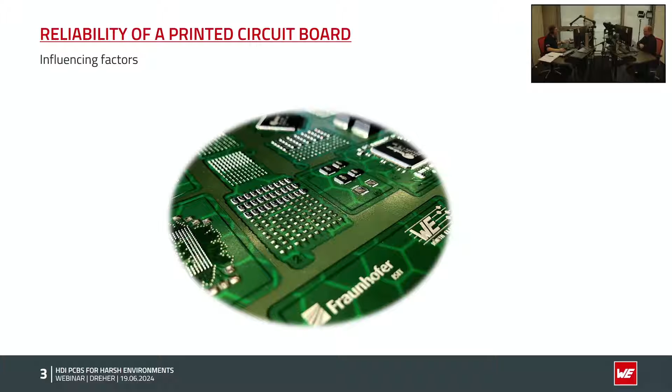So let's dive in with a quick overview. I thought, for example, voltage breakdown is a very important topic. We will discuss a lot about temperature and temperature cycles. We have some mechanical stress through vibration or through different components. We have some harsh environment gases with some bad contents in the air for the PCB, and of course humidity is always a very interesting topic.

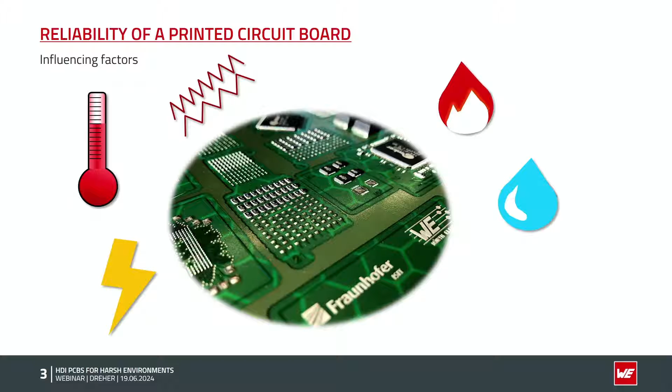But before we dive into these topics, what is reliability and what is a good definition of reliability? And that's here in my summary box for every topic, and I pretty much like this definition. Reliability describes the ability of a system or a component to function under stated conditions for a specified period of time. I can give you different numbers for reliability of your PCB, but can you give me the stated condition or the specific period which you need this product working? Very often that is very difficult to answer.

And in many sections, a lot of customers have industry applications. Do you really know what your end customer is doing with your board? Are they putting it in a nice media room like we are here in the webinar, or putting them close to a galvanic line in a production which have different conditions? So very often it's very hard to define the stated conditions and the specific time. To measure the reliability is, compared to that, often very easy.

So let's dive into the topics, and I would like to start with a simple one and we get more complex as further we progress through the slides. Let's start with humidity.

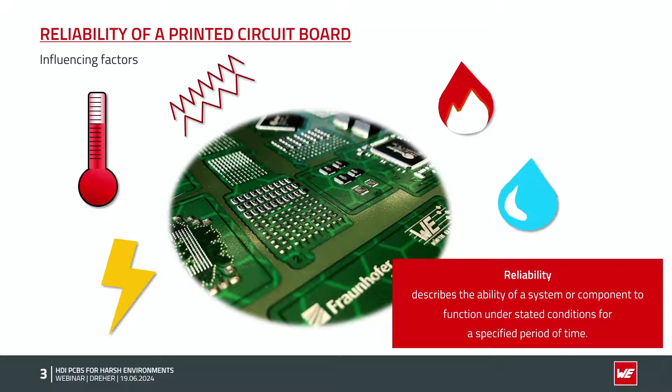The PCBs are built with a composite material, so we start with glass fibers, coat them with resin, apply some copper, and then multilayer is more or less done. The copper and the glass fibers are pretty stable, but the epoxy will definitely absorb some moisture from the environment.

And here is an extract of our great summary, Physics of Humidity. I put a link in this presentation because Andreas Schilpp had already given a nice webinar and a good summary with a lot of slides on it. There you can get more information on that topic.

But as a quick introduction, if you use a dry PCB, put them in an environment like 40 degrees Celsius and 92% relative humidity, you can see that after a few days already a lot of moisture gets absorbed by the material, and it will continue for a very long period until it finally stabilizes and gets more stable.

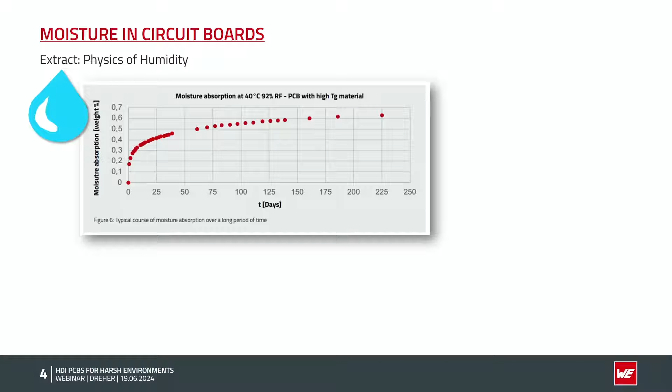The question already, and that is design dependent, is what is the critical level? How much moisture is okay for the PCB, and then it is too much. And that's definitely dependent on the layout. There's no simple black and white answer. It's always a little bit gray.

In this extract, or in this Physics of Humidity paper, you will find also some ideas about drying, how to get rid of humidity from the PCBs. And again, the layout is here a very important factor. You can see here we have a section with only resin, no copper at all, with a little bit of copper, some copper, and full copper, for example, on a ground layer.

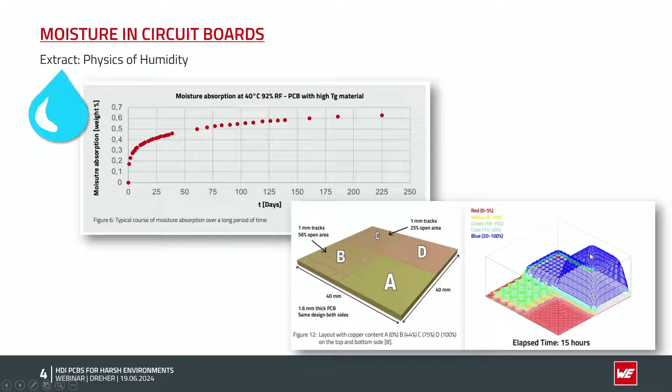And when you do some drying, here in this example it's 15 hours, you can see that in the only resin area, the humidity gets very fast in, but also it gets very fast out. And as more copper you have, copper is a good barrier for moisture. It's harder to get for the moisture in. It can creep in from the edges, for example. But again, also at drying, it's harder to get rid of the moisture, so it has to move to the edges. You can see here in this graph on the edge it's dry, and in the middle it's still very wet.

That's great. Now Andreas gets some coffee.

That's one not translated page.

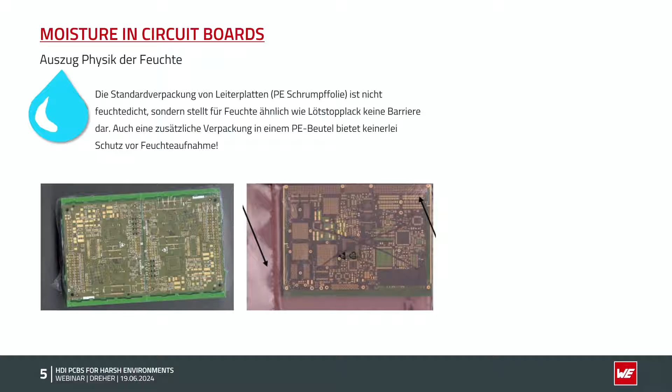One more point is the packaging of the boards. A standard packaging of a typical PCB uses only PE plastics, and this is no protection for moisture at all. It's a mechanical protection - if you put a glass of water on it, it sheds the water, but moisture in the air can pass through this PE plastic very easily and go in and out as it likes. If you really want moisture protection, you have to use aluminum coated bags, which have a high moisture barrier so you're really protected.

In general, boards have to be dried before use, before assembly. If you get them from us, they are not pre-dried, so in general you have to do it yourself before the assembly process.

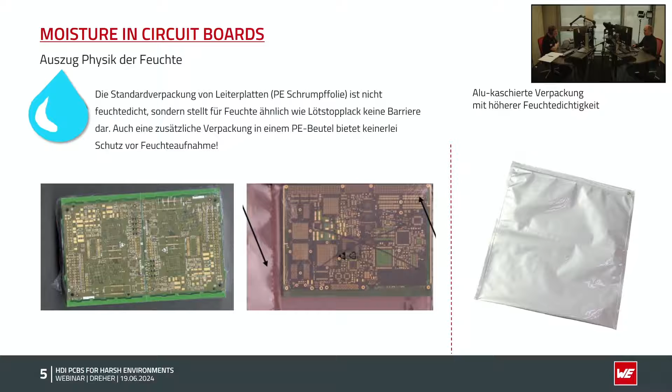There are a lot of things to consider, and as I mentioned, we already put together a nice webinar and a very big summary. You can find the link directly on our homepage today if you check for moisture physics, or you'll find the link later in the slides directly to the landing page where you can deepen your knowledge on this topic.

Printed circuit boards are sensitive to moisture, and it must be evaluated depending on the layout, because the layout, as we already learned, has a big impact on the moisture content. Another topic is harsh environments for the PCB.

In discussions with customers, I often hear, 'we're just doing simple electronics for industrial applications, we don't have very high sulfur or chloride contents.' But we are now getting close to summer season, and a lot of big towns have smog problems in the air in summer. In the meantime, in big towns you have a very high concentration of these gases in the air. A few years ago we used such concentrations for accelerated testing, and now you already have them in the town air. So this can really be a problem everywhere, in all applications.

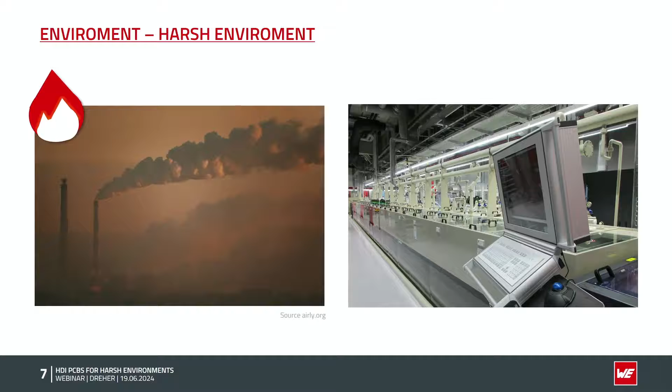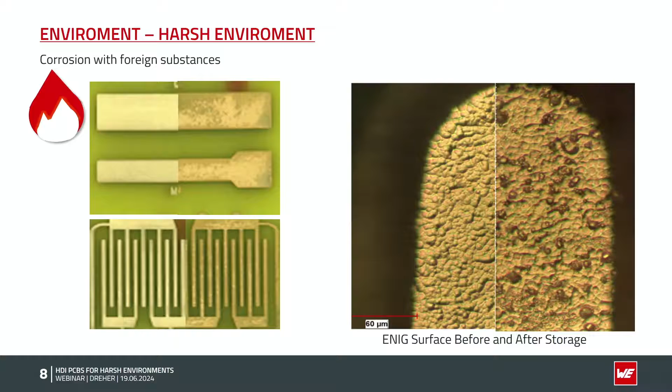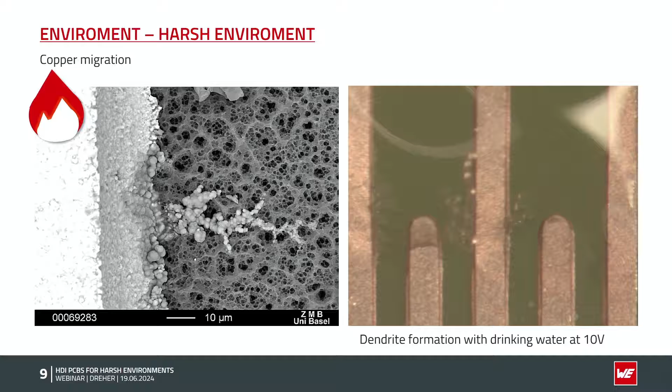If we look additionally at chemical surfaces like immersion tin or immersion silver, we often see copper migration. You can see here in this animation I used a test structure with only 10 volts DC, and I put a drop of drinking tap water on it - immediately it's really live. After seconds you see migration happen, creating a short, and the structure fails. Of course a drop of water on electronics is pretty extreme, but humidity on the surface can cause the same thing over weeks or months, and the structure will fail.

So here's a summary: we have different causes. We have corrosion, especially with sulfur or chlorine products. We can have oxidation before assembly, which is a problem in storage - after assembly it's typically not an issue anymore. Or we have this kind of copper migration.

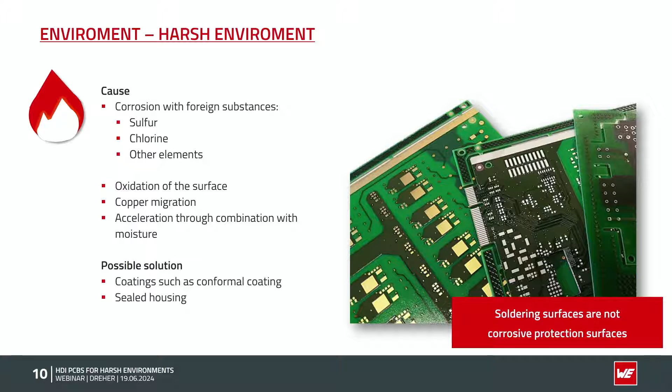If you have a combination with moisture, this will accelerate the aging and can cause pretty fast problems. What are possible solutions? You have to protect the electronics for these areas, they are not made to withstand it. So a coating can help, like a conformal coating, or you need a sealed housing, for example the picture with the computer with a sealed housing so that you don't get any crazy substances on the electronics. So definitely the point is soldering surfaces are not corrosive protection surfaces, even if it's nickel gold.

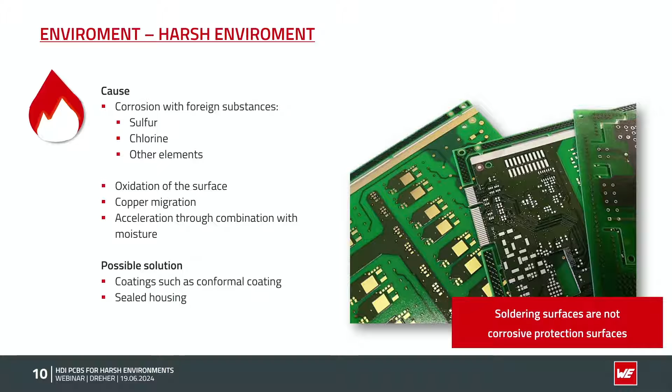Some mention gold is not corroding. Yeah, true. If you look at ancient artifacts from the pyramids 4,000 years ago, they are still shiny, they look great, but they are massive gold. On the PCBs we have only 50 nanometers, so it's a very thin thickness of the gold, and by standardization it's a porous surface, so the sulfur, for example, can penetrate the gold and oxidize or corrode the underneath laying metals. So definitely you have to protect the electronics against that, they are not protecting themselves.

Another very important and hardly discussed topic is mechanical stress in printed boards. The PCB itself, as I mentioned, is a composite material with glass fibers, epoxy and copper. We have additional solder joints with some tin alloys. We have components, sometimes we have an interposer, like in this case the BGA. This is a different base material to the PCB, often with a very high TG. You have the silicon die, the chip itself, with the wire bondings afterwards, and some molding compound with fillers. On the right hand side you have a similar BGA but with a metal lid, which is often a nickel alloy, sometimes with copper areas as a standoff or as a heatsink. Copper has very good heat conductivity.

Again, some different FR4 material, for example, and the PCB. With all this mix of different materials, that can cause internal stresses, especially if you change the temperature.

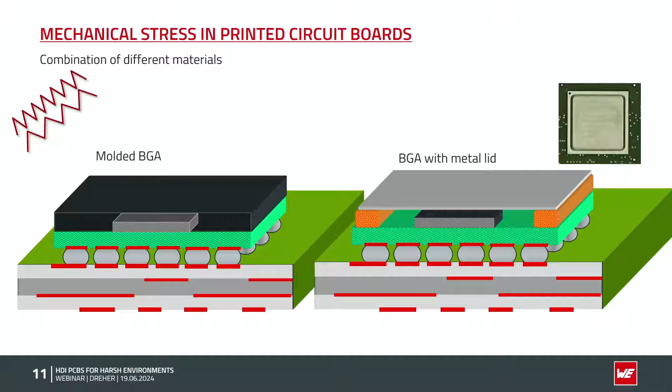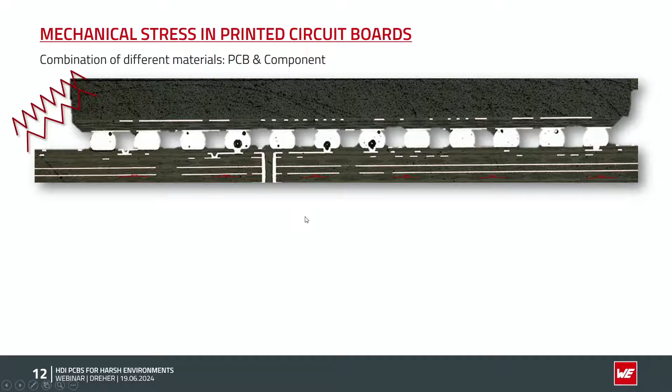Let's have a closer look. Here we have a microsection. On top you have a BGA with a molding compound. The silicon die is not hit here, it will be deeper into the component. You have the solder joints, the BGA balls here, and underneath you have a standard multi-layer board with some micro vias, buried vias, and a lot of tracks. In that case, the customer had the problem on the left-hand side, there was some stress, and if we have a closer look, this ball is actually this one.

There is a crack underneath in the material, and really the whole copper pad, including some resin, was ripped off the PCB. Another ball with a micro via in pad - the micro via had withstood the stress and was bending the inner layer, and here you can also see a crack into the material. In that case it was connected by a track, and the track got a break and was destroyed - that was the failure mode for this board.

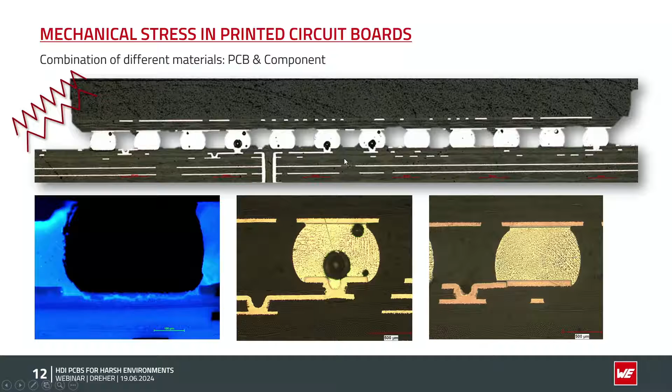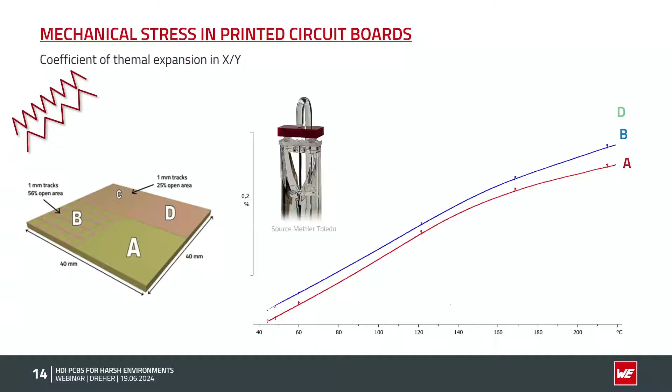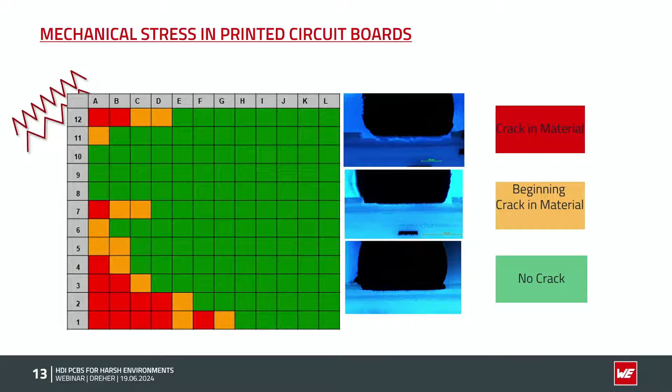And if you include all the materials inside the BGA, the mismatch should be as low as possible. What was the customer's solution here? We changed the position of the component from the edge of the board more to the middle of the board, added a little bit more copper on the ground planes so that we get more stability, less stress, and afterwards the whole section was green.

So the layout will definitely influence the mechanical properties of a printed circuit board, and in general, more copper will strengthen the board.

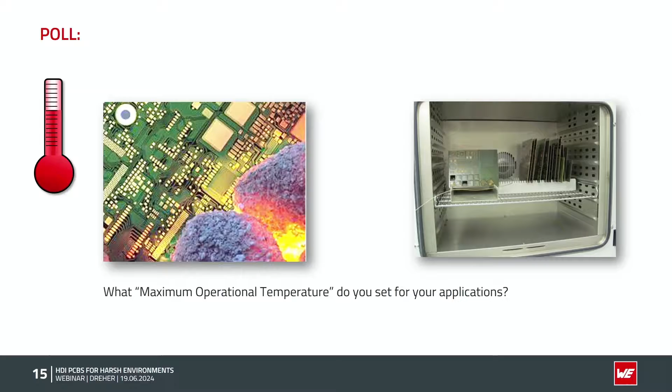So you have the numbers and it's still a pass, and that's really a point to think about - is this really enough for your application, and where a safety factor should definitely be added. So for example, this is a section.

There's a question from one of our participants: what temperature are you talking about? TA, Tin, TJ? I would assume it's TA, so the ambient temperature - is that right?

Yeah, that's a good question. To be honest, to translate that to the UL standard - definitely it's a good point, because that's why I bring it up. Maximum operational temperature, for me as a PCB point of view, maximum means maximum - so the hottest point in the field. But there are definitely different specifications, and to be honest, I'm not aware of this T-in, TA distinction.

But what we do is take the board, put it in the oven, heat it up, for example 1000 hours at 125 or 150 or 160 degrees. You can see in the as-received state it's a nice black forest green, and after some temperature exposure you definitely see a degradation in color, but also in the properties. The plastics get more brittle, the solder mask gets more brittle, and the factors will change.

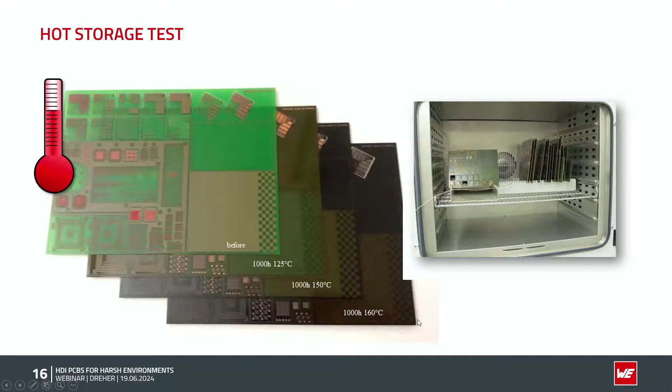That's some point to consider. We have a pass, for example, for our solder mask at 160 degrees, but the UL standard had, a few years ago, the maximum level at all - the highest level possible in paperwork was 130 degrees. A few years ago they added a second, higher value of 150 degrees, which now modern base materials and modern solder masks can be listed in UL to this temperature. But as I mentioned, a few years ago, even a TG 200 material was listed as a MOT 130 material, because there was no higher class.

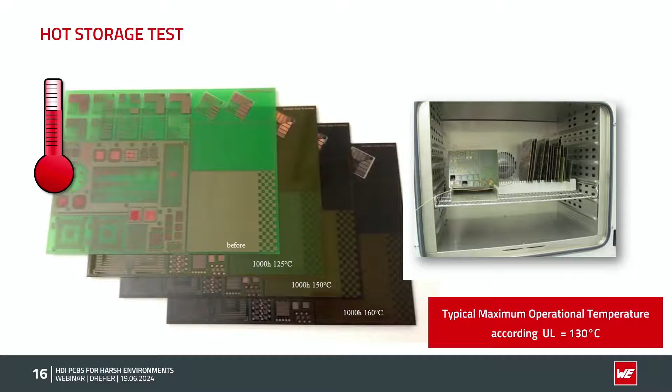And that's very often a big discussion, and that's why if this is so important for you and your application, we have to talk about it beforehand. What do you mean, how do we define maximum operational temperature? Is it the UL standard, which is a pretty simple test? Do you have some other ideas, do you have some peak temperatures? Maybe a component has some internal temperature which is locally heating up the board. We have to talk about such things if this is still possible.

One example, the dielectric strength of some materials. Here we have the setup for how to test it on a board. We have a kind of multimeter where you can set up, for example, 1000 volts, and you measure the resistance on some layout features.

In this cross-section, we see the solder mask very often. The edge is the thinnest part, so we will test here and have some typical values.

But can we calculate it down? For example, a typical thickness will be maybe 5 microns, maybe 7 microns on the edge. Can we calculate it down to some value per micron? You cannot scale it down freely, there is some limit.

The same is true for dielectrics like FR4 prepreg. With one prepreg, there is a chance the IPC allows some residues inside the prepreg per some area, and this residue can lower your dielectric strength. So if you have a high voltage application, you should always use two prepregs, because the chance that some inclusions are in both prepregs on the same place is close to zero. That's where you can use the high numbers.

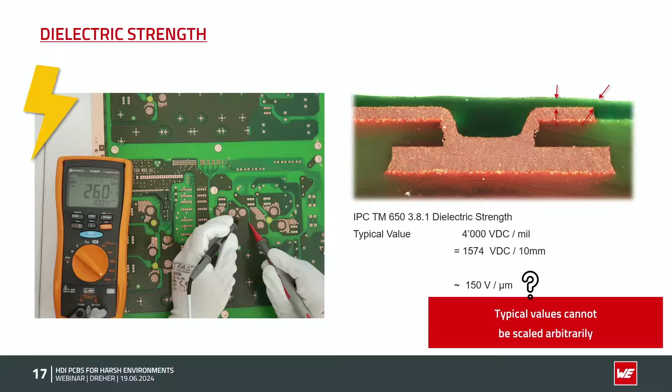Another thing, and now Andreas gets a second coffee.

Another thing is, if you look on a data sheet, the typical numbers on a data sheet are carefully measured in a lab area, but can you use these values directly for your field application?

Do you have in your application such a setup where you can have, for example, 400 volts as a breakdown voltage? I don't think so. And again, here only the raw material, the core, is tested, and it's not a real PCB. So the data sheet value is true, but can this value be translated one by one to your field application?

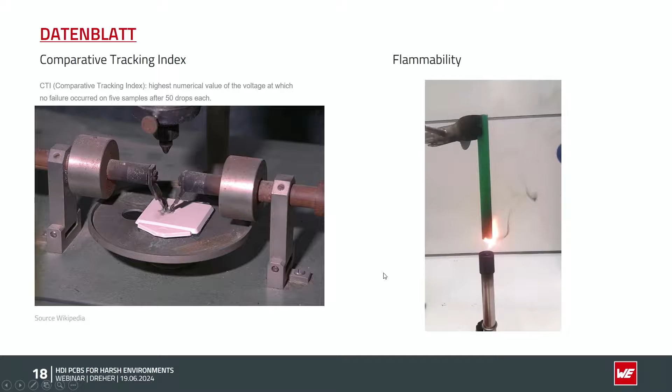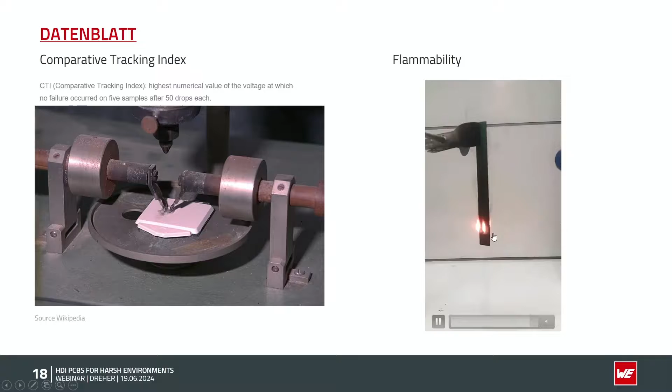Another example is the flammability test. Here you use a very closely monitored flame, put it 10 seconds to a test strip, and after additional 10 seconds the flame should be extinguished by themselves. If you have that, then you get a V0 by UL, for example.

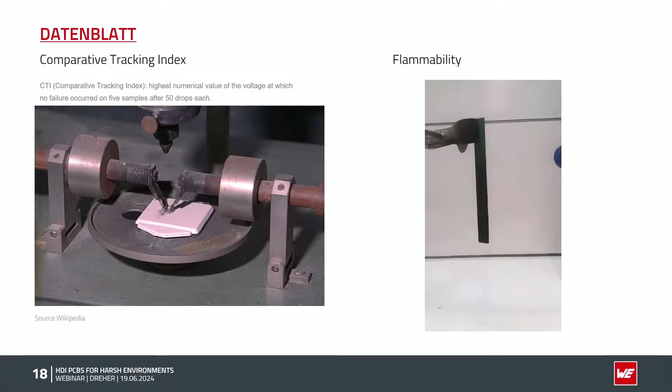But again, do you have such an application in your environment in the field? Is this the one-to-one conversion for you? You can very well compare material A against material B with such values, but can you use such values in your real-world application? So definitely the transferability of datasheet values should be closely checked, and you really have to think about what values you use for your setup.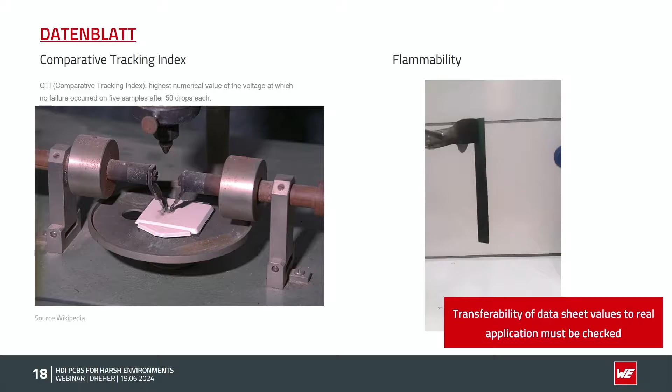So now a very big topic came about temperatures for PCBs. That's the most discussed topic for PCBs. A quick look at what is in the life of a PCB, what temperatures are affecting it.

In our production, according to the complexity, we have 1 to 4 press cycles at 200 to 220 degrees maybe. In the solder mask oven, the curing of a solder mask is done 1 hour at 150 degrees. Later in the assembly process, you have typically 3 times 230, maybe 240 degrees.

For testing, we use 6 times 260, but please only use it for testing, not for a real process. That would be too hot and will destroy the PCB pretty fast. And the field application, as we mentioned, it's very often hard to define what the board will really later see.

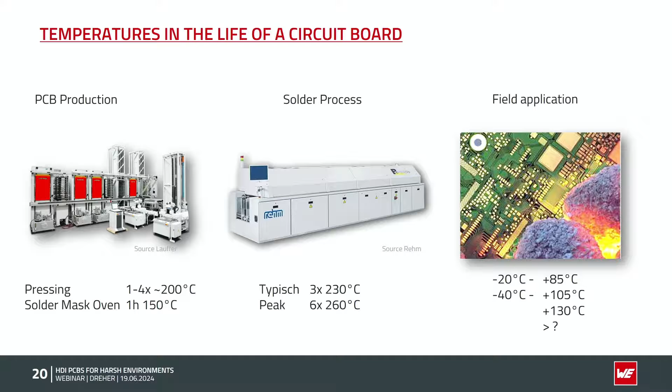So there are a lot of temperatures to consider. Typically, we test them in a 2-chamber oven where you have an oven on top and some freezer below, and the boards will move up and down between these 2 chambers. That can be half an hour or an hour cycles, and the temperatures can be defined.

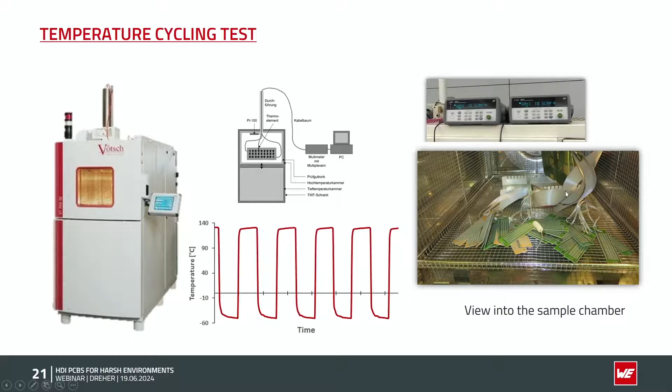You can use some online monitoring, add some cables to the coupons and measure them, and get an idea about the quality.

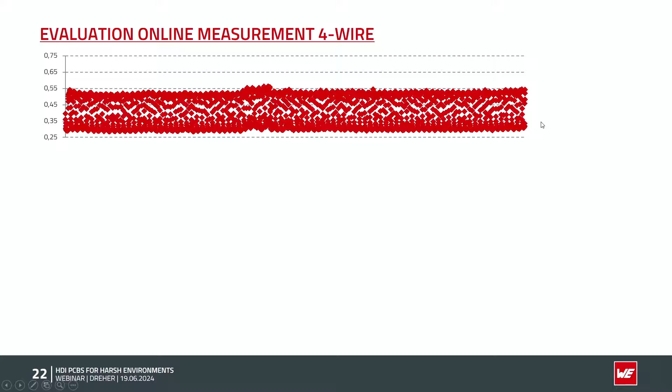There is an IPC standard for this evaluation to measure the resistance of a board. For the IPC it's very important you have some milliohms, or ohms in that case, before, and then you do some cycling and measure it also at the end. If the beginning and the end are the same, it's a clear pass. There we can very fast agree.

On the other hand, if you have some change - here it was 0.5 before, afterwards it was higher - there is some critical number which we can define together, or there is some standard in the IPC, and then again, pretty clearly, it's a fail. But we are working in real life.

What if with such a measurement? IPC check, before and after the same, just with standard IPC, that's a pass. To be honest, I don't want to fly with this kind of plane into the holidays. We have to check what happened here, and that can be very tedious and very time-consuming to find the problem and to fix it afterwards.

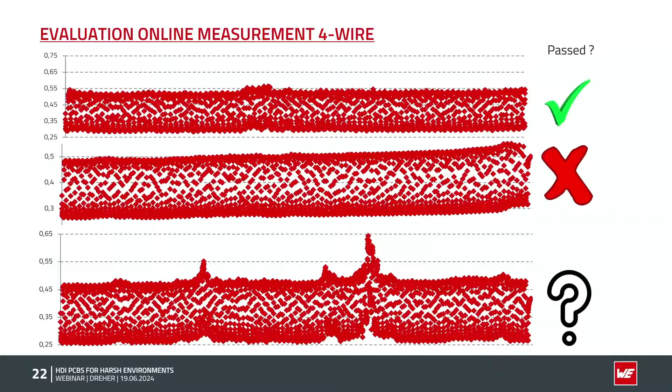That was the thing - we still have the oven in use, but it was very hard for us in a qualification process to really understand what's going on. So we changed the test method to this Interconnect Stress Test 10 years ago already.

So what is Interconnect Stress Test, or IST in short? We have different test chambers where we can add the coupons. We will add some cables, heat them with some currents, 7 to 10 amps, up to different values. In this graph it's 150 degrees for 3 minutes of heating and 2 minutes of cooling, only at room temperature.

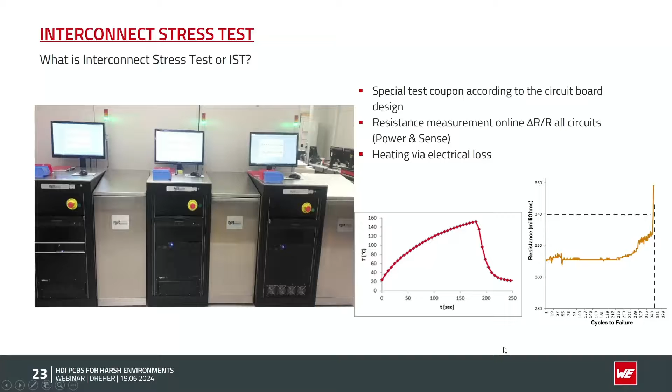During this whole thing, we measure the resistance online, really live. We see the live measurement, and when the resistance changes, for example 10%, that's defined as a failure. The test will stop for this single coupon, while the others can progress. I can take this coupon, investigate and learn about what was happening to it.

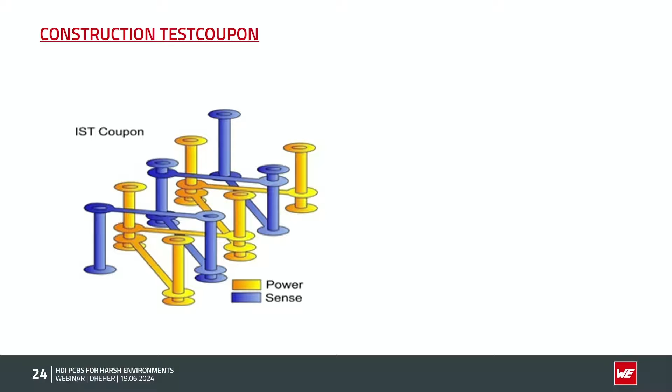Let's have a closer look. We have different structures here internally. The golden one is the power structure, where we can add some current and heat the coupon up. And with a sense coupon we can measure different structures.

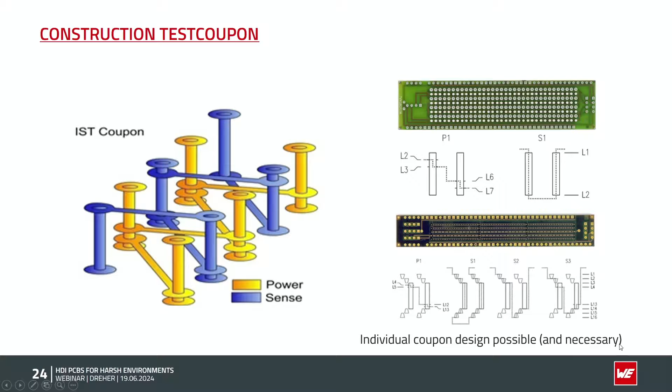For example, here it's a generic coupon where we test some small vias, some through-hole components, or that one is a more complex one, which was created for customer use with a complex HDI board with a lot of micro vias and through-holes, buried vias, where we can test individually - is the micro via more reliable, is the buried via more reliable, or what's the critical point. So you can really create individual coupons, and very often that's necessary and very helpful to compare different sections.

In the following slides, we will compare different tests with the so-called Weibull evaluation method, and I don't want to go too deep into the statistical things. So in the graphs, for us very important is this 63.2% failure mode. That's for a Weibull evaluation an average to compare the average failure rate. The shape is not so important for our kinds of evaluation.

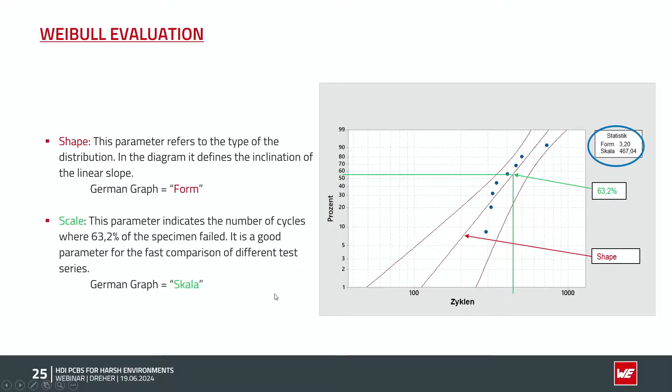So here are some tests with mechanical vias. It's always the same board, nothing changed. They are produced in one batch, and we applied different test temperatures. The black line was 150 degrees test temperature, the red 170, and the green one was 190. And you can see for 150 degrees had a typical failure rate of 1,500 cycles when most of the coupons failed, which is pretty good.

And of course, the higher you go in temperature, the lower the average cycles will be. So after 400 cycles, most of the 170 degree coupons failed. And after only 120 cycles, the 190 degree ones failed. So if you have such a peak application, you can see the stress is pretty hard, and the factor between is very hard. So if you have some local peak temperature, that can destroy especially through-holes pretty fast.

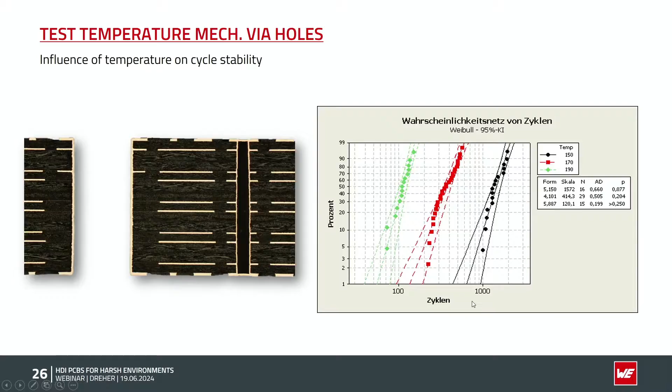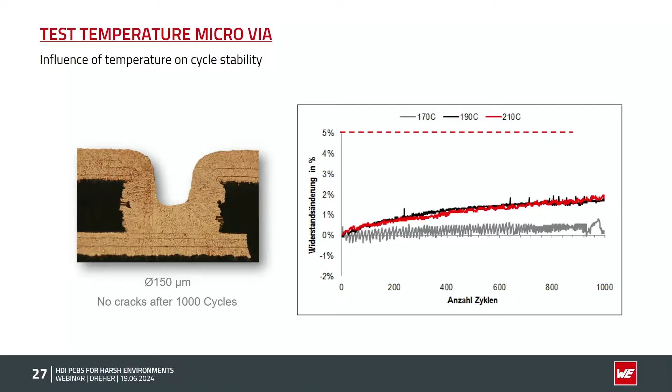Compare this to microvias. The microvias have a benefit - they only connect one layer to another layer, so the Z thickness is pretty thin, so the stress is also thin. Here you can see microvias with different temperatures, and the resistance change over 1,000 cycles changed only a few percent. 5% would be the failure mode, so the microvias after 1,000 cycles didn't show any sign of wear and tear. So microvias, through the low Z value, are pretty stable and pretty reliable.

The same thing applies here. We compared different thicknesses of a board. We had a board, the target thickness was 2 millimeters, and for the test we added on some other boards with the same layout 2 prepregs to increase it by 0.2 millimeters, and we removed 2 prepregs to have a thickness of 1.8 millimeters. The 1.8 millimeter board had, in the green section, an average failure rate of 180 cycles.

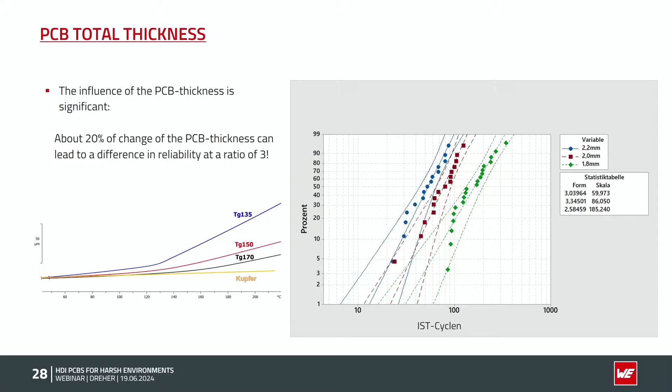The 2 millimeter board had roughly 80 cycles, and the thickest one, the 2.2 millimeters, failed at roughly 60 cycles. So with this 20% change in thickness, you have a factor of 3 in the reliability. That's an important thing to remember. Every millimeter in thickness will directly affect the reliability.

And again, a very hard comparison: if you create a very thin board with microvias and a small buried via, 0.6 millimeter thickness, we stopped the test after 2,000 cycles without any failure. They were still good and did not fail, we just had not more time to progress the test. So the thinner the board, the more reliable it will be.

Very often in the last weeks and months I get the question, what is it about non-functional pads and what is our recommendation? We had a student who did a study and compared a lot of literature, and it was really a 50-50 split. Half the literature told you to add the non-functional pads because it improves reliability, and the other half said remove them, it will add more reliability. So that's why we wanted to do the test.

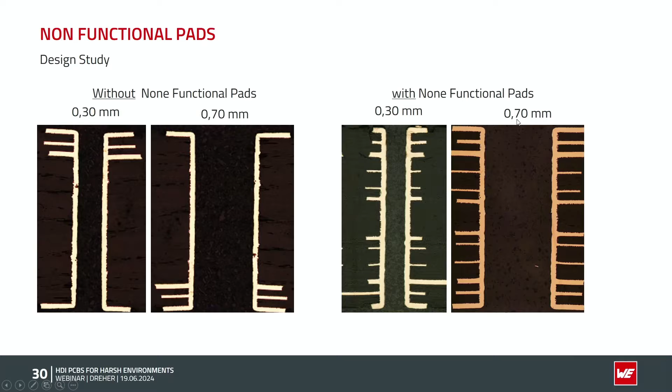We have the same board, produced in one batch. Half of the coupons had the pads removed, on the other half the pads were included, and we compared small vias of 0.3 with bigger vias of 0.7. Here is the summary.

Very interestingly, the small vias of course have less copper so they generally fail earlier, and the 0.3 millimeter vias with non-functional pads failed pretty early, with an average number of 150. On the other hand, the 0.7 millimeter holes had the best reliability in that test, at an average of 370, roughly double. The boards without pads had somewhere in the middle, around 300. So that's very unfortunate. What do we learn from this section?

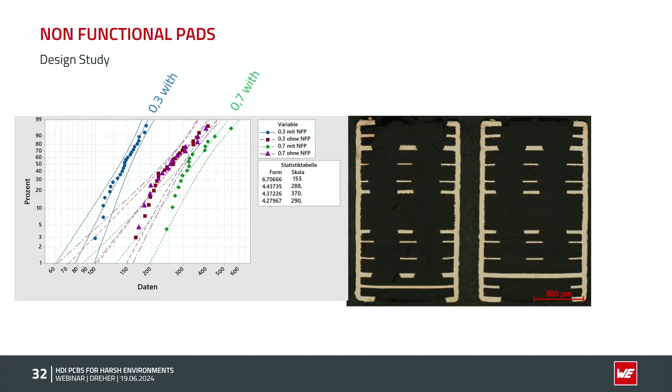It definitely depends. Sometimes it's better to have them, sometimes it's better to remove them. It depends on the stack-up, on your layout and on your board. I think the literature is pretty right here, because they compare different layouts and always get a different answer. So if you want a conclusive answer for your board, we are happy to offer you a test and test your design to get you some reliability numbers for your dedicated layout.

What we also do internally, because the layout, as we learned now, has a lot of influence on all these tests, is check how stable our processes are. We do a lot of process inspections with this test method, testing more than 6,000 coupons in our Würth Elektronik facilities. We have in total 4 dedicated machines across different facilities to test our processes, always with the same layout. Here you can see the numbers from 2022 to the now completed 2023, and the reliability really was not moving very strongly, so we have stable processes.

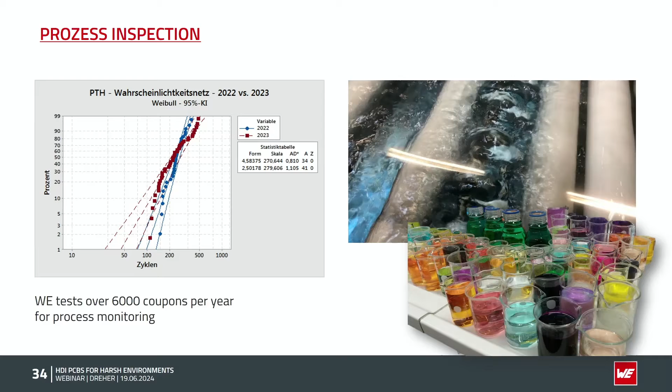On the right hand side, that's a typical picture if you visit our chemical lab in the morning: all the different samples from the different batches with different chemicals, where they test a lot of different values also for process inspection. So for us internally, it's a very important tool for process inspection, that we know our material, our processes, our machines are always the same quality.

So let's sum up all these points. The test temperature must be carefully chosen. If you have too high a temperature, you will just burn and destroy the boards, and the values are useless. If you are too low, you have to test for ages, it takes too much time, and everybody knows time is money.

You can design test parameters, for example the PCB thickness. In general, the less thick the board is, the more reliable it will be. With non-functional pads, unfortunately, I have to tell you it depends, but we are happy to offer you an IST test for your dedicated board to test it. Also other comparable tests.

You can compare material A against material B, or if you want to test our competitors, feel free to order some IST tests from them, and we compare them on our machine to see who has more reliable boards. We use it internally for process testing, to know our processes are stable, and also for very critical applications like avionics or nuclear power plants. It can be useful and healthy to test on a lot basis before delivery, so everybody is sure the boards will meet the reliability you expect.

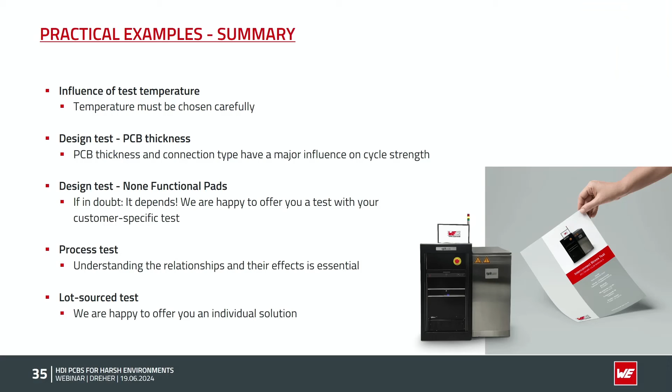That was a quick walkthrough through a lot of different reliability points. I hope I met your interest.